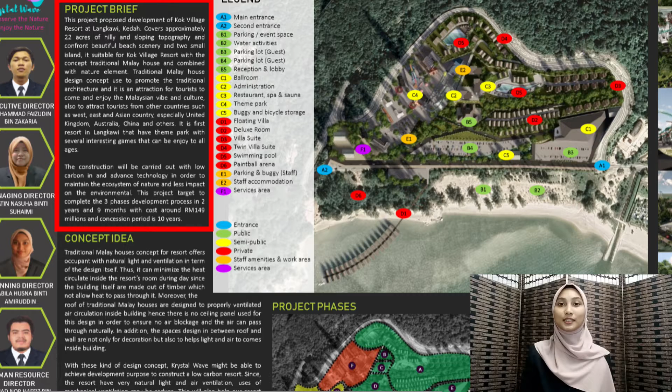The client for this proposed project development is Langkawi Development Authority, LADA. Estimated gross development cost is about 149 million ringgit Malaysia, while estimated gross development value is about 550 million ringgit Malaysia for 10 years. The concession period that has been granted for Krystal Wave Sdn Bhd is 10 years.

In 2004, the site location was affected by a tsunami due to the geographical position. In order to save Pantai Kok, LADA decided to do reclamation work to build an island to retain strong waves from hitting Pantai Kok. The man-made island is now called Teluk Burau.

The proposed site is one of the strategic places in Langkawi, Kedah. Not far from the proposed site are some interesting places that tourists often visit during their stay in Langkawi, such as SkyTrex and Langkawi Sky Beach Cable Car.

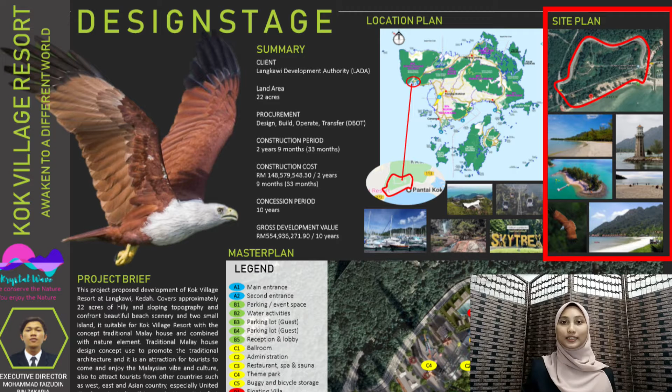For the green practices, Kok Village Resort will use sustainable building materials such as timber and concrete for thermal efficiency. The concept of traditional Malay houses with a touch of green technology has been chosen as the design concept for Kok Village Resort. This concept offers visitors natural light and ventilation in terms of the design itself. With this kind of design concept, Krystal Wave might be able to achieve the development purpose of constructing a low-carbon resort.

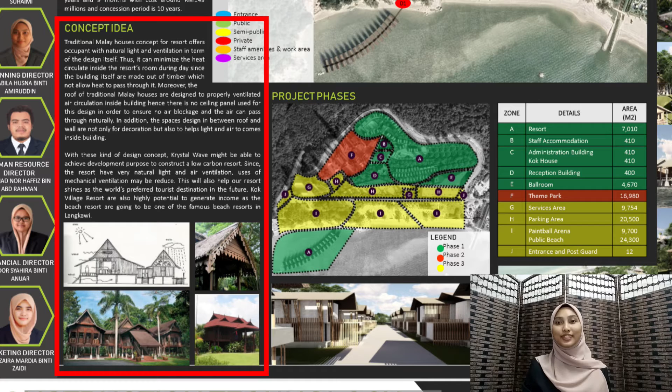This purpose responds to the government's intention for Langkawi to be the first free-carbon island, like Jeju Island in Korea. This is our master plan for the proposed project.

Kok Village Resort will consist of 4 types of rooms that suit all types of visitors. Some interesting facilities include a spa, ballroom, beach view restaurant, and our special feature, a theme park with 2 entrances that can be entered from any part of the island.

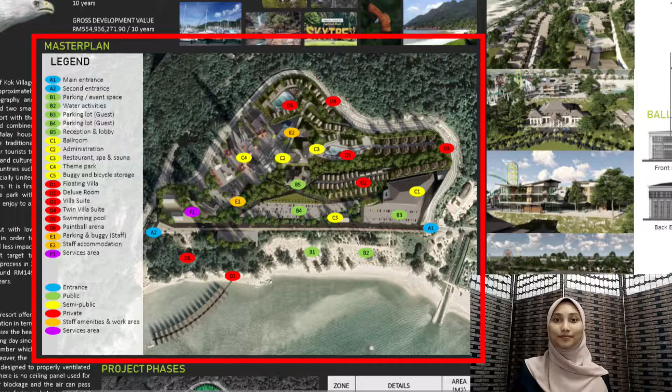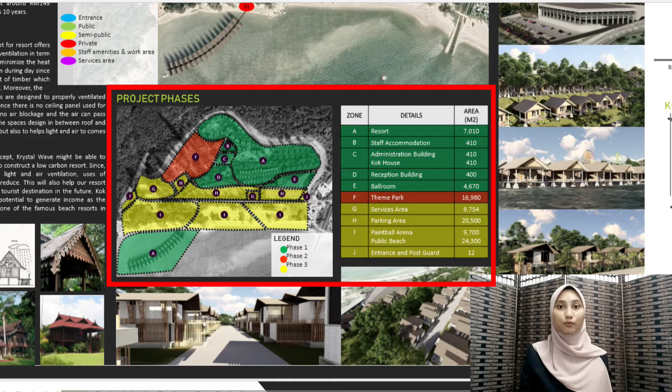Furthermore, for the construction work, Kok Village Resort will be carried out in 3 phases. Phase 1 will consist of resort accommodation and facilities, phase 2 will consist of the theme park, and phase 3 will consist of the services area.

From a branding perspective, Kok Village Resort is an upscale beach resort that has a luxurious, sustainable and fashionable image. This resort offers 112 rooms with 2 styles, which are on the ground and on the water.

It also offers a ballroom, clubhouse, spa and sauna, gym, lobby and very attractive entertainment, which are swimming pool, bar and theme park. Guests can enjoy the natural scenery with green surroundings and a beautiful beach style. Guests can also experience a breathtaking view from their rooms, which face either the green or the beach.

The overall concept of this resort is to implement the national traditional house concept, as well as to ensure our resort is less urban. Our resort restricts the usage of cars; instead we encourage guests to use a buggy, ride a bicycle, or walk by themselves. Kok Village Resort consists of 4 types of accommodation, which are twin villa, suite, deluxe room, and floating villa. With this type of accommodation, guests can choose what suits them.

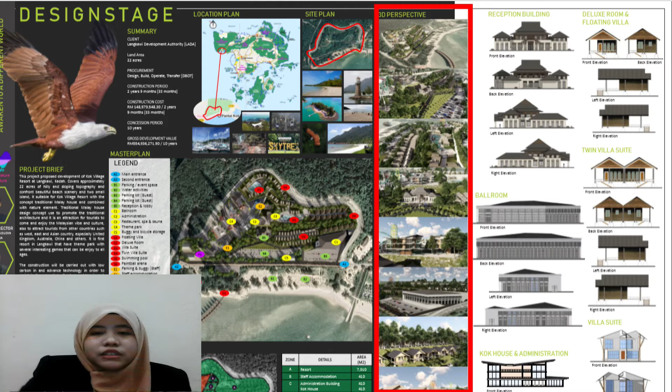The reception building is located at the middle of the resort, with a total floor area of 400 square meters. The design of the building uses the traditional Malay concept, using timber finishes for some building components. The area of the reception building consists of a lounge, cafe, meeting room, admin office, lobby, drop-off, and fish pond. The capacity for this area is around 220 pax at one time.

The ballroom building is an ideal function venue for weddings and dinners, corporate events, and exhibitions, with a total area of 4,670 square meters. It uses a modern concept, developed with an exclusive view for the building, and the capacity of this ballroom building is 1,000 pax.

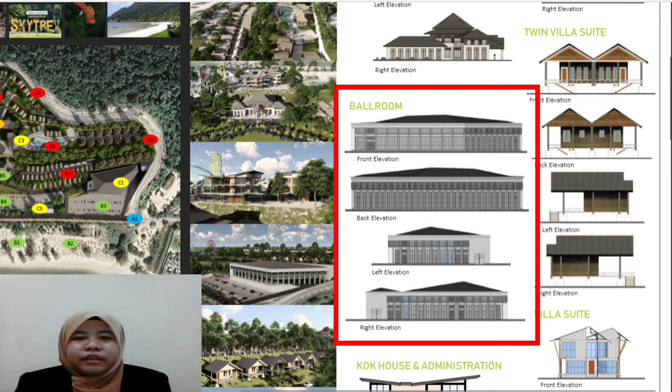The clubhouse and administration building are the same building, approximately 410 square meters, a three-story high building located at the center of Kok Village Resort, using modern architecture complete with advanced technology. The clubhouse can accommodate around 250 people at one time, with several facilities such as restaurant, lobby, coffee shop, souvenir shop, gym, spa and sauna for the guests.

As for the administration building, it is for staff only, which has office space, exhibition area, file room, surrounding meeting and seminar room. The building uses glass entry panels to allow natural light to enter the building in order to reduce the usage of artificial light.

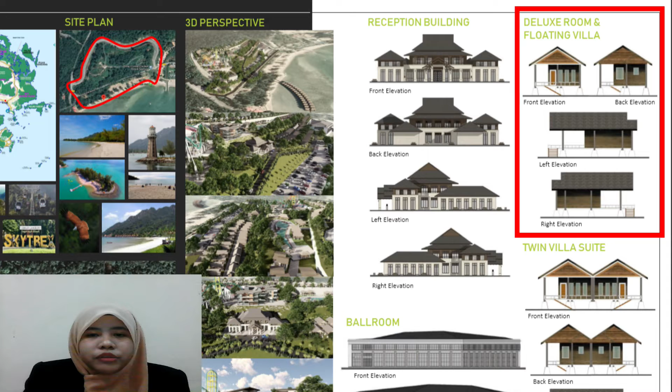The Deluxe room and floating villa design concept is based on a traditional Malay village house. The total area of the room is 25 meters square for one unit and can accommodate two pax, suitable for a honeymoon.

As for the twin villa suite design, it's the same as the deluxe room and floating villa, but combined with two rooms. Between the rooms, there are two sliding walls that can connect the rooms. The total area is 50 meters square for both units and can accommodate four pax, suitable for a small family. There is also a pool between the twin villa suite buildings.

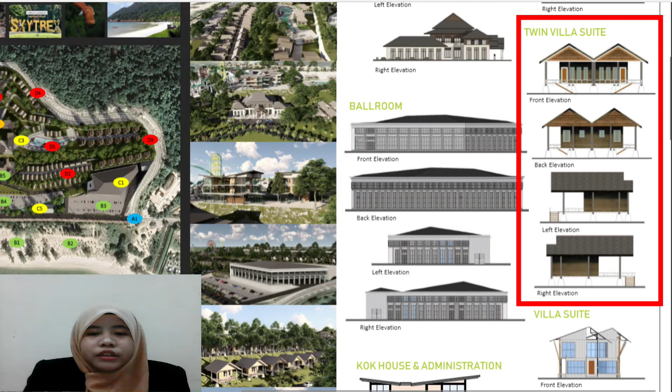Villa suites are most suitable for holidays with larger groups, accommodating up to 10 pax, suitable for big families, friends and others. The buildings are two-story high with a total area of 200 meters square. Villa suites offer more spacious accommodation with 5 bedrooms, a kitchen, dining room, 2 living rooms, a snooker room, separate bathrooms.

It includes 5 queen beds in each room with pillow and mattress. The design concept for the Villa Suite is modern but includes some timber finishes for the exterior.

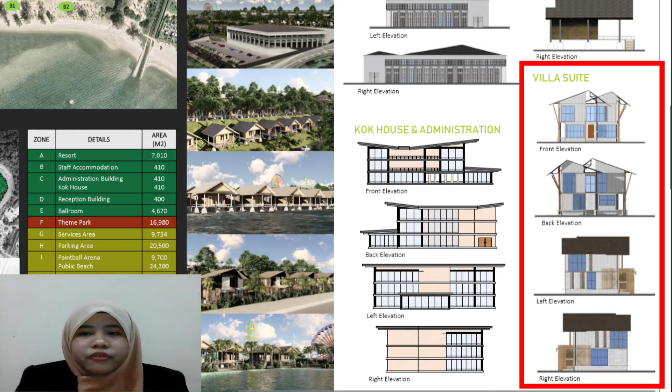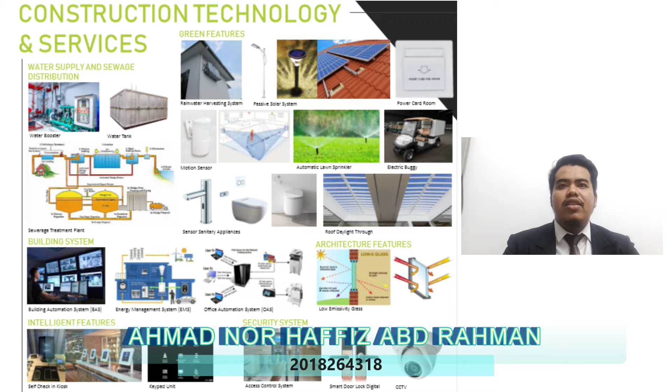Next, I will explain the construction technologies and services in our proposed development, Kok Village Resort. First of all, our proposed Kok Village Resort provides water supply and sewerage distribution.

We use a water tank to supply water to all the buildings, and a water booster to get the water supplied quickly into the buildings. For the sewerage plan, we have our own sewerage treatment plant at the proposed site.

For the next technology, we use green features technology. Firstly, at our proposed Kok Village Resort site, we have a rainwater harvesting system, and a passive solar system. Because we use this passive solar system, we can reduce our electrical costs, providing green features to our proposed site.

For the hotel building, we provide power card rooms, and around the building we have motion sensors and automatic lawn sprinklers. This is especially for our landscape, because with a sprinkler system we can care for our landscape to make it better.

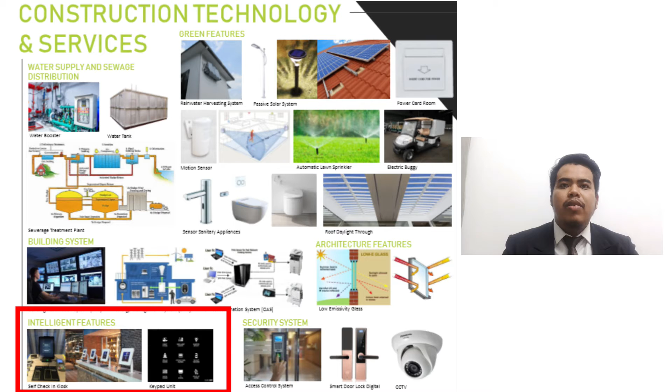For our intelligence system, we have self check-in at our reception, so when there is a group of tourists, this makes it easier for them. We also have a keypad lock, and lastly, for the security system, we provide an access control system especially in the reception building.

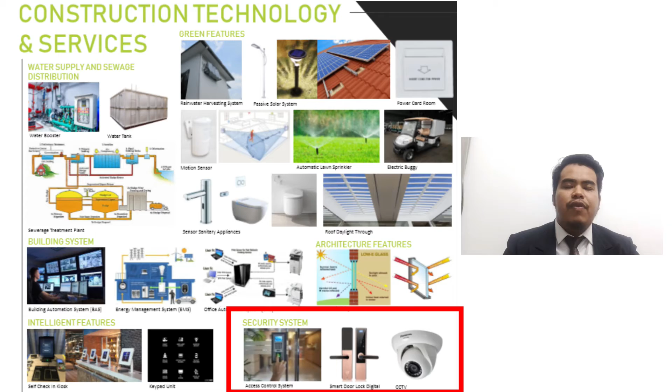At our hotel building, we have a smart digital door lock. Lastly, for the security system, we have a CCTV system to monitor all activity and to protect against bad conditions.

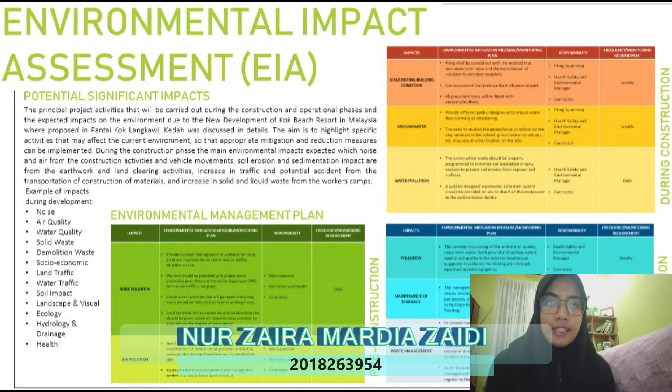I want to present the Environmental Impact Assessment, EIA, covering the principal project activities carried out during the construction and operational phases, and the expected impact on the environment.

This is due to the new development of Kok Beach Resort in Malaysia, proposed in Pantai Kok, Langkawi, Kedah, which was discussed in detail. The aim is to highlight specific activities that may affect the current environment, so that appropriate mitigation and reduction measures can be implemented.

Examples of impact during development include noise, air quality, water quality, solid waste, and so on. As for the environmental management plan during pre-construction, firstly is noise pollution impact. To mitigate this, we need to provide proper management or scheduling for using plant and machinery on site to reduce traffic situations on site.

Responsibility is by site supervisor, site safety and health, and contractor. Frequency of monitoring requirement is daily.

During construction, for groundwater impact, we need to provide different path underground to ensure water flows normally, or dewatering. Responsibility is by the piling supervisor, health and safety environment manager, and also contractor. Frequency of monitoring required is weekly.

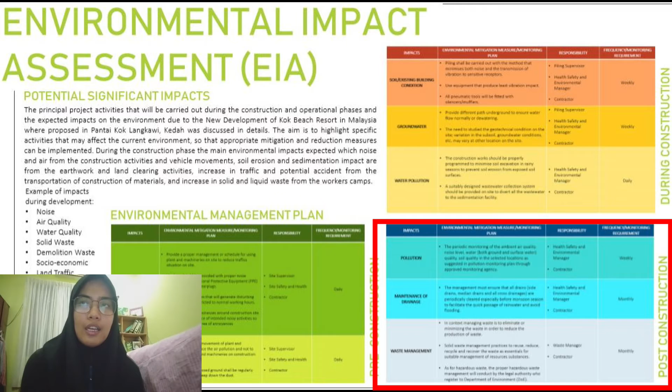For maintenance of drainage impact, management must ensure that all drainage, side drain, median drain and cross drainage are periodically cleared, especially before monsoon season, to facilitate the quick passage of rainwater and avoid flooding. Responsibility is by health safety and environmental manager and also contractor. Frequency of monitoring required is monthly.

Present about the project planning.

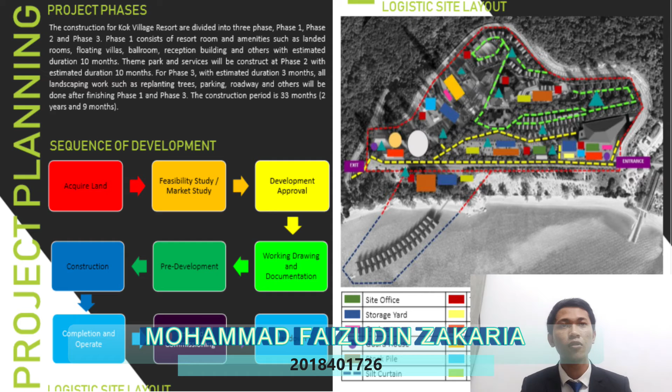For the project phase in the project planning, construction of Kok Village Resort is divided into 3 phases: phase 1, phase 2 and phase 3. Phase 1 consists of resort rooms and amenities such as landed rooms, floating villa, ballroom, reception building and others, with an estimated duration of 10 months.

Phase 2 is theme park and service area, which will be constructed in a duration of 10 months. Phase 3 has an estimated duration of 3 months. All landscape work, such as replanting trees, parking, roadway and others, will be done after finishing phase 1 and phase 3. Total construction period is 33 months, which is 2 years and 9 months.

For the sequence of development, there are 9 steps: acquire land, then feasibility study and market study, next the development approval and working drawing and document, then pre-development and construction, completion and operation, testing and commissioning, and lastly handover.

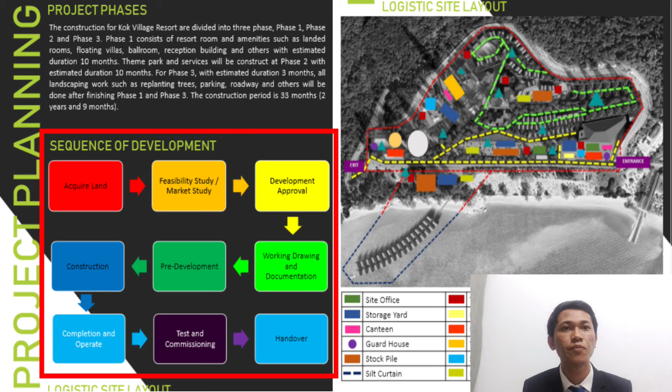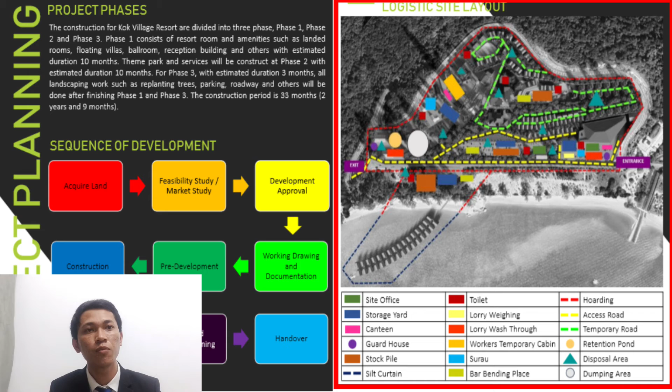For the logistics site layout, we have the site office, storage yard, canteen, guardhouse, stockpile, silt curtain, toilet, lorry weighing, lorry wash-through, workers' temporary cabin, surau, bar bending place, hoarding, access road, temporary road, retention pond, disposal area, and lastly dumping area. Next I will describe the work program.

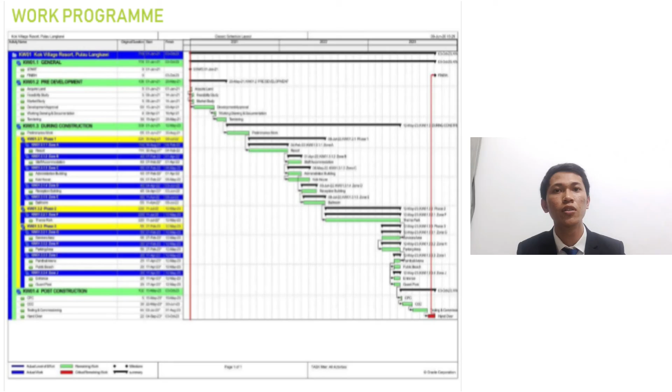Last but not least, I'm going to present about procurement and financial. As you know, public-private partnership is a collaboration between a government agency, Langkawi Development Authority (LADA) under the Kedah State Government, and a private company, our company Krystal Wave Sdn Bhd, in order to share responsibility, resources, risk and benefit of Kok Village Resort.

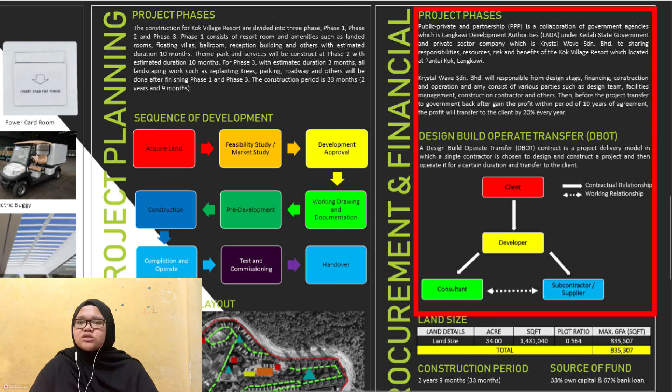Therefore, our company will be responsible for design, finance, construction and operation. The type of procurement used for this development is Design, Build, Operate, Transfer (DBOT), whereby a single contractor is chosen to design and construct a project and operate it for a certain period of time before returning it back to the client. As mentioned before, the size of development is about 34 acres and the construction period is 2 years and 9 months.

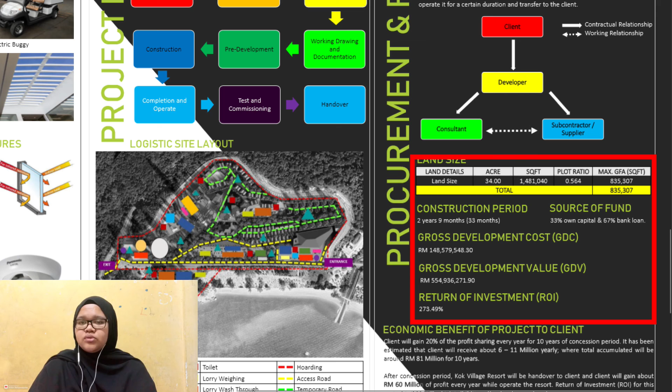Hence, there are two sources of fund for this project. First is 33% by own capital, equivalent to 50 million, and second is 67% by bank loan, equal to 100 million. GDC for this project is 150 million, meanwhile GDV is about 555 million.

There are economic benefits of this development to the client, whereby the client will gain 20% of profit sharing every year for 10 years of concession period. It has been estimated that the client will receive about 6 to 11 million yearly, where the total accumulated will be around 81 million for 10 years.

After the concession period, Kok Village Resort will be handed over to the client, and the client will gain about 60 million in profit every year while operating this resort. ROI for this project is 273%, which is 2.7 times the development cost.

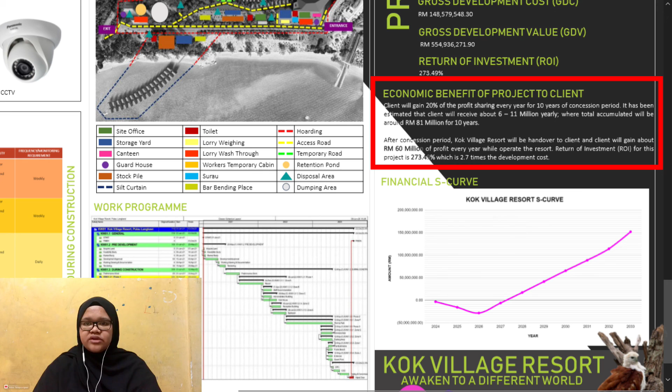Finally, the graph shows the financial S-curve for this resort development for 10 years, starting from 2024 to 2033.